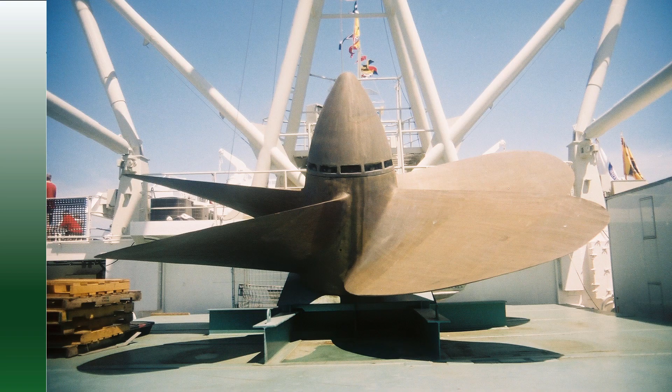This is called the Betz limit. Originally developed for wind turbine performance, it applies to any type of normal axial flow propeller, like the kind you put on the back of your ship. The Betz limit predicted a maximum efficiency of 59.3%. Let's round that off and call it 60%.

Reality doesn't always match the simplified assumptions that went into the Betz limit, so we can see efficiencies that are slightly higher. A typical propeller hovers around 65% efficiency, and some very good propellers can even achieve a maximum efficiency of about 72%. But all these numbers are still close to the Betz limit, which shows us that it is fairly accurate and believable.

But even worse, all of these practical implementations of propellers are already pushing past the Betz limit, which means we really can't expect them to push much further. They're already stretching the limits of those assumptions.

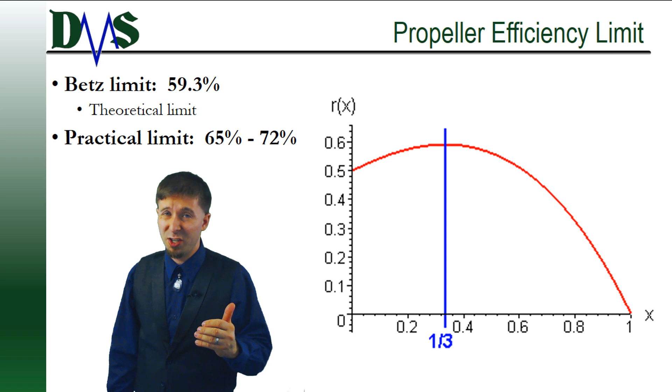Little known secret? The limit on propeller efficiency has nothing to do with the design of the actual propeller. Propeller efficiency gets limited entirely by the physics of how water enters the propeller. This is what I'm calling the propeller slipstream.

Now, the full explanation of the propeller slipstream is fairly complicated, and at this point, fluid mechanics people usually need to resort to math. If you happen to be a math person, this is a wonderful, very satisfying explanation involving many Greek symbols and lots of pluses and minuses. But for the rest of us, we should stick to a more physical analogy, which is not perfect, but it conveys the main idea.

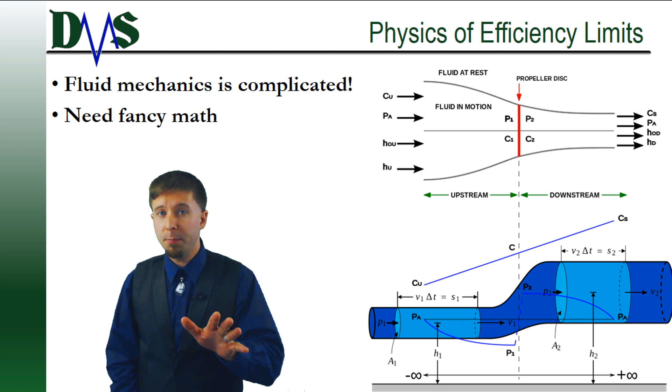For the moment, I want you to forget all of the details of how a propeller produces thrust. Let's just settle that we know it produces thrust. We know that a propeller must produce thrust, pushing the ship forward. But now, Newton's third law reminds us that if we want a thrust force forward, there must be an equal and opposite reaction on the water pushing back.

Imagine this. You've got a ship fixed in the water. Now, to get a thrust, the water must shoot out the back of the propeller faster than when it entered the propeller. That acceleration of water is what creates the thrust. But now here's the catch. We pay a penalty for all the surrounding water.

See, all the surrounding water sees that central core that's getting sucked into the propeller, and it thinks that looks very exciting, so it wants to come along for the ride. Catch is, it's not going as fast as that central core of the slipstream. So we have to accelerate that extra mass of water back up to our core speed just to keep up with the propeller. And only when it finally reaches the propeller can we actually generate thrust from all of that extra water.

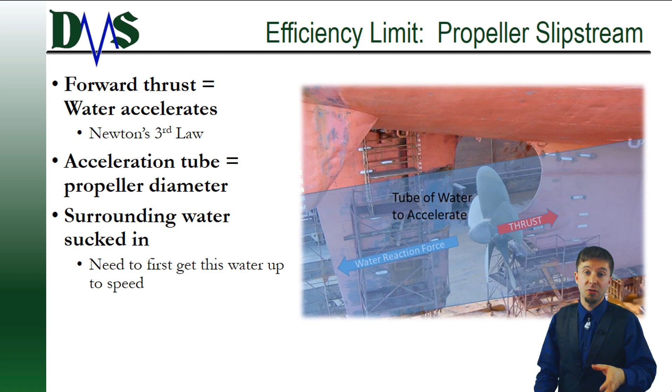So in the end, our chunk of water is not a straight tube. It actually starts out as the same diameter as the propeller, but it expands as we move upstream. And this is what we call the propeller slipstream. Well, the Betz limit sucks. But although we cannot completely blow away the Betz limit, we do make a few modifications to get some modest gain.

Now, up to this point, all of the theoretical discussions here have assumed that the propeller was somehow magically suspended in the middle of the ocean, with open water all around. But we know that's not reality. Real propellers are mounted close behind the hull of a ship. And that close proximity creates some very interesting interactions between the ship and the propeller.

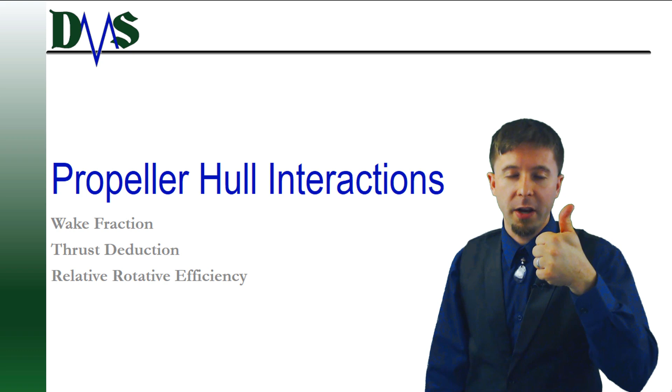Some of those interactions help efficiency of the propeller, and some hurt it. Now, the three main interactions that we are going to look at today are wake fraction, thrust deduction, and relative rotative efficiency. Number 1, wake fraction.

If a ship moves forward at 16 knot speed, the propeller does not see water traveling at 16 knots. There's a head twister. See, this is due to the wake fraction. Now, the water slows down as it fills in the gap behind the stern of the ship.

So if the ship is traveling at 16 knots, the propeller might only see water moving at 15 knots. And that's due to that slowing down effect, the wake fraction. We measure this wake fraction as a ratio of the reduction in water speed at the propeller compared to the ship speed. Wake fraction typically varies from around 0.03 to 0.2. So we're saying it can adjust propeller efficiency by 3 to 20%.

So wake fraction is a good thing, okay? Propellers generally are more efficient when the oncoming water stream slows down. And remember that it only depends on the hull, not the propeller shape. That's important because it lets us find out the interactions between the propeller and the hull, and then play what-if scenarios, trading out other propellers to see if we can improve things at all.

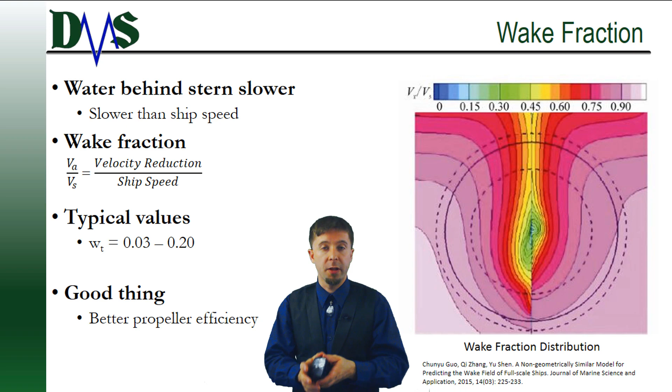Number 2, thrust deduction is the enemy of propeller interactions. Remember that a propeller generates a suction upstream of it. Now, this suction is part of what creates the thrust, but more importantly is how it interacts with the hull. This suction creates a field of low pressure in the water ahead of the propeller. That low pressure sucks against the hull of the ship. The problem is that low pressure and that suction actually pulls the ship backward and slows it down a little bit. The issue of this low pressure region gets attributed to the propeller.

This is more of an organizational convenience. You see, naval architects, we typically like to keep the hull and the propeller separated as different concepts. So we're going to take this suction force and count it against the propeller instead of the ship's hull. So how we count that is a deduction in the thrust of the propeller. Thrust deduction gets measured as another ratio. We like ratios. This time we count it as the ratio of that extra drag force compared to the propeller thrust. Now, it would be nice if this were a small number, but the thrust deduction is typically somewhere between 0.05 to 0.2. That's a 5 to 20% penalty on your propeller efficiency.

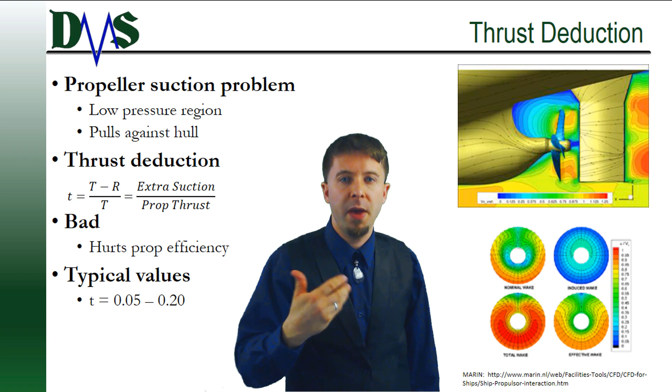Number 3, relative rotative efficiency. Say that 3 times fast. The relative rotative efficiency finishes out our set of efficiency modifiers, and this is something of a catch-all for all the secondary interactions. See, the wake behind the ship is not a uniform speed, and that variation means that the propeller blades see different water speeds as they rotate around. When the blade is vertical, straight up and down behind the stern, it sees slow water directly behind that stern. But compare that to the relatively clear water of the blade as it's horizontal and exposed to that running free stream. All of those variations in flow rate as the blade rotates around, all of those affect the torque required to spin the propeller.

We call this variation the relative rotative efficiency, and that's the ratio of the propeller torque when you're measuring it behind the hull compared to the torque when you tested it in open water. Relative rotative efficiency can either be good or bad, and this ratio varies from around 0.95 to 1.1. So 95% to 110% on the propeller efficiency modifiers. So values below 1 are bad. They're showing that your propeller performs worse behind the hull. Although it is fairly common to customize the propeller and actually adapt it to the specific flow patterns of your vessel. In these cases, the relative rotative efficiency may actually go above 1. That's a good thing. It means your propeller does better behind the hull.

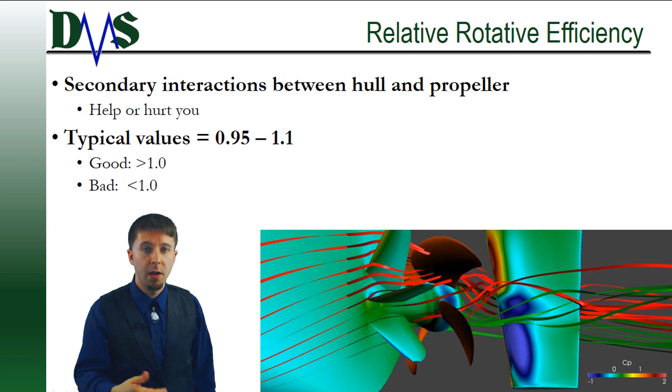So time to wrap it up. You add all of these interaction effects together, the thrust deduction, the wake fraction and our relative rotative efficiency, and the combination of all 3 of these can add up to a difference of up to 40% modifier on your propeller's efficiency. Now, naturally, we want that modification to move in the positive direction, increasing propeller efficiency. And a good propeller designer can do just that.

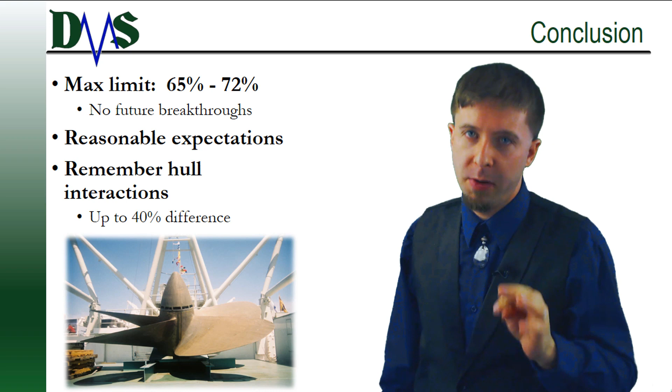Wish all you want. Your propellers will never get significantly better than they currently are. They remain forever limited to the fundamental physics of fluid dynamics. No manufacturer can provide a miracle device to double your propeller efficiency. A typical propeller is always going to be around 65% if used correctly. The best propellers out there will only push that to maybe 72% at the top. So when considering your next propeller, remember these limits and arrive armed with reasonable expectations.